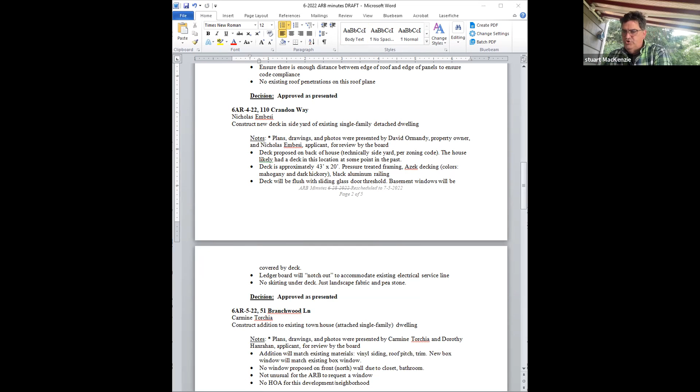First order of business is old business 6AR-6-21, 1835 Monroe Avenue. The Cabot Group modified approved facade improvements from 2021 to Brighton Commons. Is anyone from the Cabot Group here? Yes, Bruce Hunt is here.

Okay, thank you for adding me to the agenda. I would like to apologize for taking up your time at the last meeting. I did not have enough information, and that was obvious. So we went back to our architect, and I believe we resolved some of the issues you had with our plan to move to a metal ACM panel on the north elevation versus using the EIFS on the entire length of that section of building. There was a concern about how we're going to tie the panel into the EIFS, and I think we've come up with a good plan now.

On either end, we will have one section of the EIFS installed, and then there will be an ACM facade framed out to tie everything together. The ACM panel we chose is a larger panel that'll have the same sectional cuts as the EIFS does in the plaza, and it's of the same color as other ACM in the plaza, so I think it all wraps together really nice.

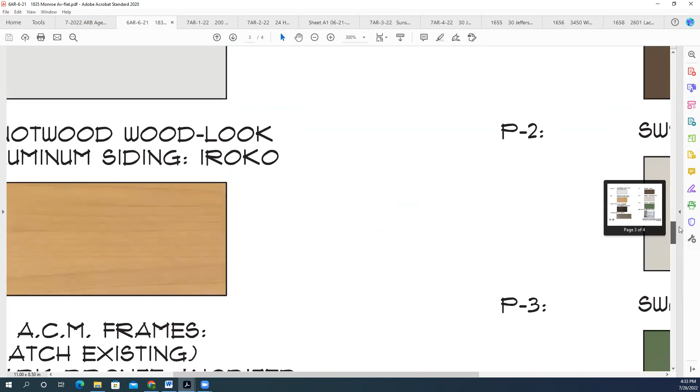Oh, I thought it was white. No, not white. You should have a sample there, I think, that was dropped off at the town. Yeah, the second page in the PDF did say bone white, but the drawings indicate, or at least the existing drawings did indicate aluminum. Okay, that's what threw me off. Clear aluminum, thanks. Yeah, so clear aluminum to match what was already submitted for the rest of the building, correct? Correct. Okay, thank you, so it should all match very well. You know, the last time we came here, we had a metal product that really wasn't adequate. We eventually agreed with that.

Anyone have any questions? Fran? Nope, I'm all good, Stuart. Thanks. Casey? No, I think I'm good. It's definitely an improvement and it ties it much better into the rest of the building, so thank you. Mary? Fine, thank you. Andrew? I'm good. Brian? Looks good, thank you.

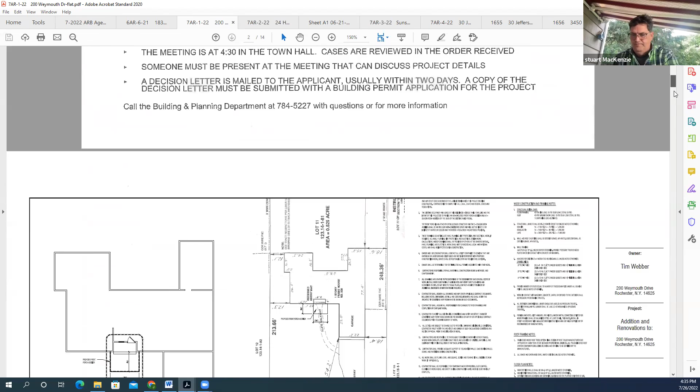Next on our agenda is new business. 7AR-1-22, 200 Weymouth Drive. Tim and Colleen Webber, construct a front porch on existing single-family home. Are the Webbers here? Tim is, yep, I'm here. Okay, why don't you go ahead?

So the front of our house is almost all garage, and I don't know if you have seen photos of that. There you go. What we're looking to do is give our front entrance some prominence. The door is kind of hidden, and when you come up to the door and open that storm door, you have to step backwards and you're right on the edge of that step. So we're looking to accomplish a couple things: make the front entrance have some prominence, have a porch there that pulls that step out away from the door to make it safer, make it look nice, and give us a place to sit down and be neighborly. Kind of boils down to that.

It would include the stone that you see in there. We cut back into the roof so that the stone sets back at that same wall face where that door is. And then it would go up into, I think you can kind of see it there on the right-hand side, lower right, that's what we're trying to do there. So we got to cut into the roof to make that happen, and then the stone would all match the stone that's on the garage.

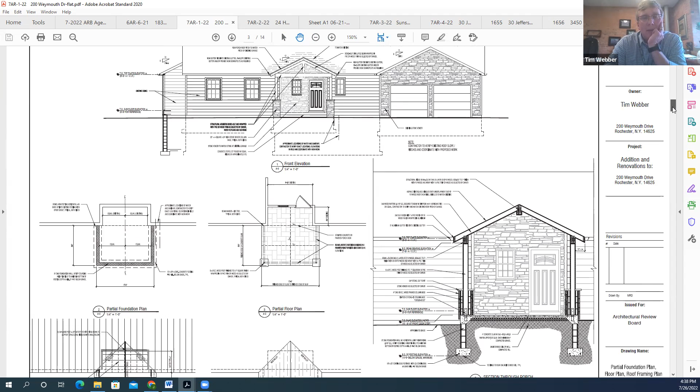The roof would match the roof that we have. It would all be trimmed out with, I think it's Azek PVC type material. And then I provided the catalog cuts for the stone as well, which is a cultured stone.

That's actually up against our house color there. Figured that was better than the catalog cut itself. I thought it represents the color better.

Okay Fran, do you have any questions? Yeah, what is the underside, the exposed ceiling beneath the overhang? It would be a beadboard, which I think in this millwork you might have an image of that as well. And what I'd want to do is a couple of recessed puck lights, and then have some options where we could do the recessed lighting or have a single light kind of hanging, and turn either one of those on. Okay, for whatever ambience we're looking for, right?

Right, no that's all I have. Thank you. Thank you. Casey? Fran asked my only question. It looks nice, thank you.

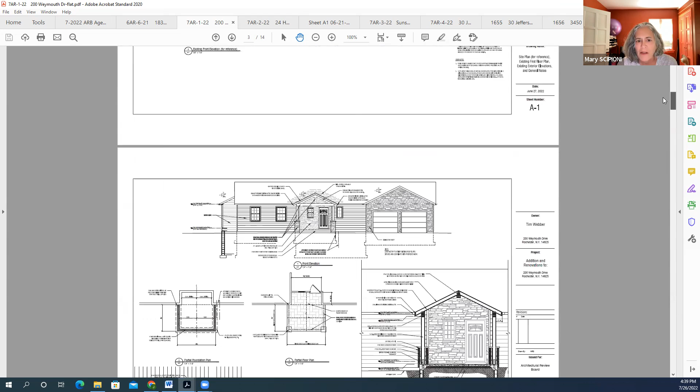Mary? I have a question about the piers with the veneer stone on them. Rather than sitting on the lower step, you have the veneer coming on the outside of the steps, and then it stops short, so you have this kind of exposed gap thing going on down there. I just wondered why that decision.

So it actually just ends, the veneer just ends short of the ground. So grade would come up to that, and I wouldn't want that to look like it's hanging in the air. Right, so I'm just wondering why you didn't just set them on the lower step and cut away the landing. I was just curious what drove that decision, because it looks like it's missing a base this way to me.

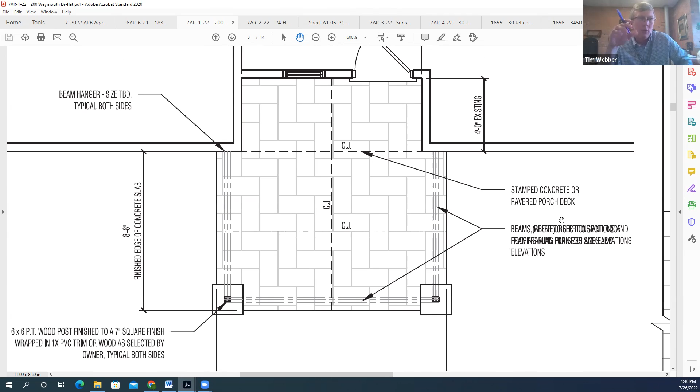I don't know if anybody else considers that an issue. Wishing I had my architect here with me. He specifically talked about that, and I'm trying to recall the language that he used. He wanted to make sure that those had some weight to it. And if you go to the plan, it sticks out from the step, I believe.

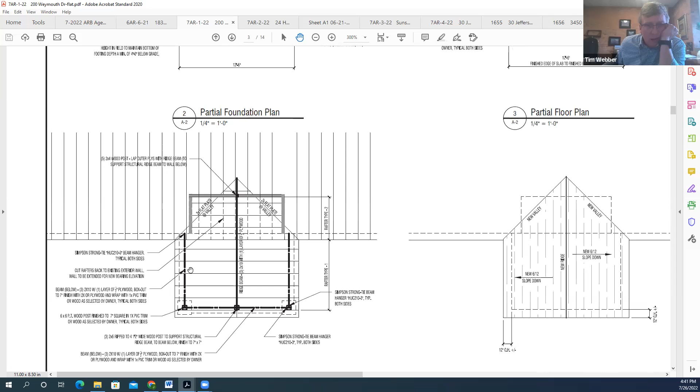Yeah, I see that it sticks out from the step. I mean, part of it might be if they did set it back so it sits flush with the concrete, then you would have the full height of the concrete exposed where there wasn't a step. So maybe they were just trying to conceal that. And I think it helps create some dimension there too, next to the step, by having it stick out a little bit from the step.

Which step are we talking about? It'd be the bottom step there. It just looks to me like they're missing a base, and there's always a concern with having the veneer running right into the ground, just ending in the ground. But it was just a question. That's all I had, Stuart.

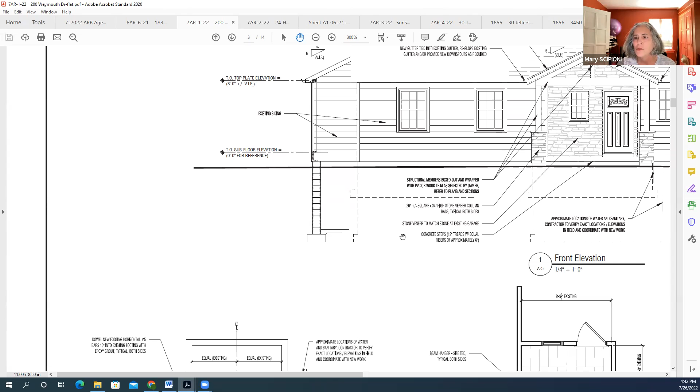Okay, Andrew? Well, on that note, I think one solution to that may be to actually put a natural stone as a base stone to your cultured stone. So your natural stone can touch the ground, so you don't have moisture contact with your stone veneer, and that could solve the issue and provide that base.

I agree, it cannot hang. It should not be hanging above the grade. And number two, you can't have soil contact with that stone veneer. Otherwise, you're going to have moisture wicking up into your stone veneer. So there's a couple different solutions, but I think that can be resolved.

My question about the gutters is there's a note that says you can reslope the gutter and or provide new downspouts as required. Jason, could you pull the existing photograph back up again, please?

So the downspout run for the front, you have, doesn't even appear, it's not on the corner. How about the inside corner of the garage and house? There's one at both ends of that front face. There is? Okay, yeah, it's hard to see because we painted it the same color as the house.

Okay, excellent. And that was exactly going to be my comment, that if you do have to put gutters onto this new addition, they should not be readily visible if possible. Oh believe me, my wife will be all over that. Okay, excellent, well that's excellent.

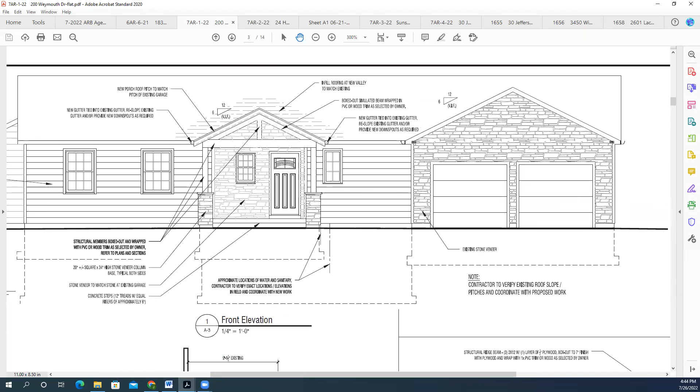And I guess my last question is, the stone veneer that you have selected, that matches your existing stone veneer on the garage? Correct. Or is it the same material? Yep. Okay, yeah, otherwise I think this looks pretty good.

And I appreciate the comment on that base, a natural stone there. By all means, I am happy to add that, it just needs a little punctuation. Yeah, understood, makes sense. Brian, any questions?

I just had one on the section view. We were just talking about the stone veneer going down. In the section view, it looks like the stone veneer covers the slab on the sides. Is that what I'm looking at? You guys see that? Yeah.

Does it do it on just the sides and not the front, or on the front as well? It would do it on the front as well. You're talking about the stone veneer, where it drops down below the slab right there. It would maintain that same elevation around, with exception to where you've got a walking surface. I would want that same elevation coming around the front side as well, but it comes off that front step to add some dimension there.

So Mary, your question was it doesn't look like it's got a base there, like there's no separation. Well, also because of the wicking that Andrew mentioned, it just needs that. It looks unfinished. We can certainly add that there. That's no problem. All right, I'm all set. Thank you.

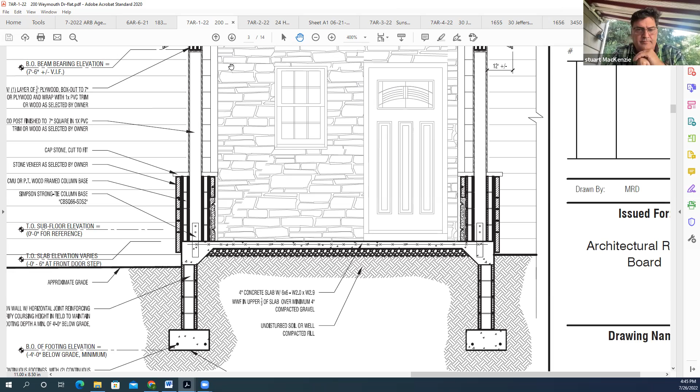All right, I just got two points or two questions for you. You can always carry your bottom step across the front of that pier as well, instead of that. Yeah, that may work as a base, but you may also get some wicking.

The only thing I catch on the existing house is you've got a vent stack to the right of your proposed gable. Just want to make sure your draft isn't changing, that it's still a positive draft on that. Correct, we'll be able to avoid that. Yeah, so just make sure your architect checks that, otherwise your first floor bathroom won't smell very good on certain days. So that's all I have.

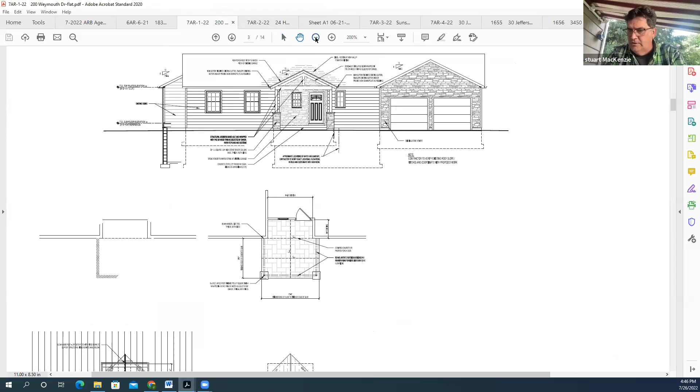Next on our agenda is 7AR-2-22, 24 Hemingway Drive, Randall Peacock. Construct addition to an existing attached garage on a single family dwelling. Is Randall here? I am here. Hi, welcome. Hey, good evening, Stuart, and the rest of the board members.

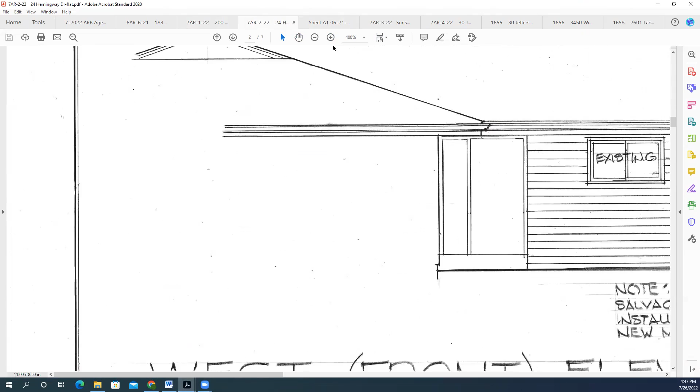This is a fascinating project they have before you. We had a zoning board of appeals meeting recently, and they granted a variance to meet the setbacks that we're doing here. These are these lovely houses on Hemingway that have no basements, they're all slab on grade. And my client would like to enlarge her garage.

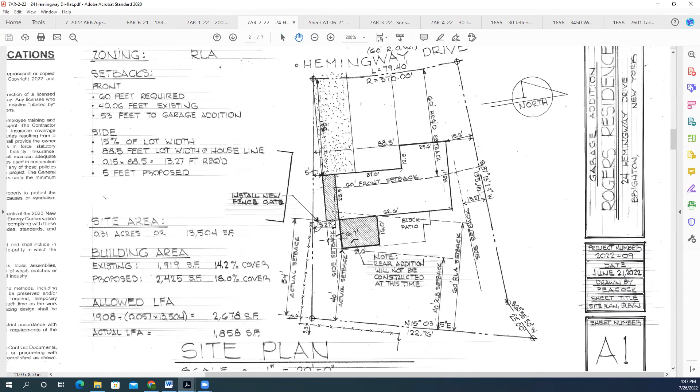We're extending it over, I think it's 6 feet or something like that, 6.7 feet, 6'8", 6.6 feet. I'm just going to extrude the existing house, same roof detail as what's on there now. I noticed, Jason, you have the older drawing there. Did you have the new ones I sent to you?

That would be better. As of late last week, my client asked me to go to a 14-foot overhead door, and the overhead door that I had on the initial application ended up being a $19,000 overhead door, which is something I'm really good at, picking the most expensive thing out there. This is more like a $2,700 overhead door, which works a little better in the budget for the project. This one's a CHI model 2250 in an almond, desert tan color, which matches the trim on the house.

We are going to take the siding off of the side of the house and reuse that on the front, so the front siding will match. We'll match it with a similar 5-inch exposure, same color vinyl down the side and the back. The roofing will be matched in there. They'll end up taking that roof off all the way back to the left side of the garage door you see in that elevation on the front of you right now.

Those roofs on those houses are way scary underframed. They're 2x6 rafters, and that little hip and the little gable poking up there. I look at it and I go, man, I just can't believe this stuff stands there. There's one 2x6 rafter with a couple of 2x6 horizontals that pick up the hip rafters and then pick up those rafters that run down the side. So we're changing that structure a little bit in the process of doing this.

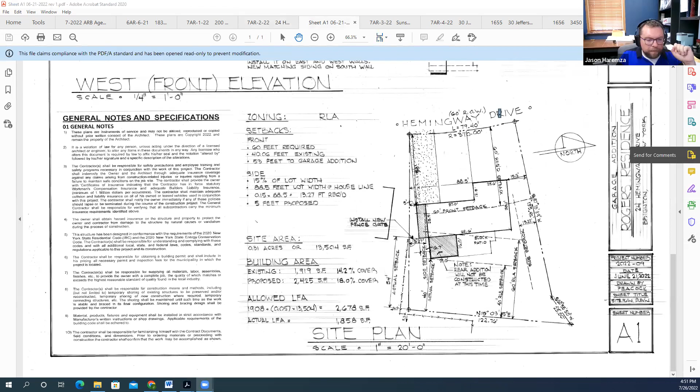Thank you, Casey? Jason, can you go to the new drawings and go to the south side elevation, just so we can see if anything changed on that sheet? Give me a moment, I've got to pull that up—that one stays the same. Okay, so it still has the one window and the end of the roof detail. I didn't give them an update on that sheet because it didn't change.

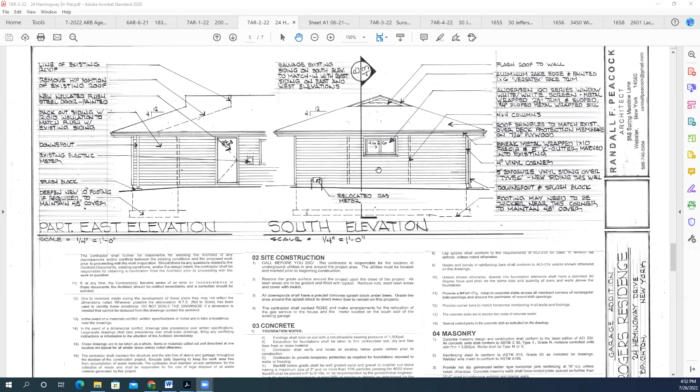I had a long discussion with my client about the window. She didn't want a window there, and I said, I know the Brighton Architectural Review Board, they're going to want a window there. So thank you for bringing that up and reinforcing the advice. I can only give advice, I can't make people take it.

Yeah, no, it looks good, so thank you, no questions. Thank you, Casey. Mary? Could we look at the photo a second, Jason, please?

I just wanted to ask Randy, is the corner of the garage at the edge of the driveway there? Yes, it'll be right about the edge of the driveway. And then is the property line at the bottom of the slope? Yes, you can see where that fence kind of bottoms out in the back—that's where the property line is. We still have, I think, 5 feet to the property line. Okay, that's all I wanted to know out of curiosity. Thank you.

Andrew? No, I don't have any questions. Okay, Brian? Looks good, I'm all set. And I don't have any questions either.

So Randy, you can call Jason's office in the morning to get our answer. I'd be happy to. Appreciate your presentation. You're welcome, take care, thank you.

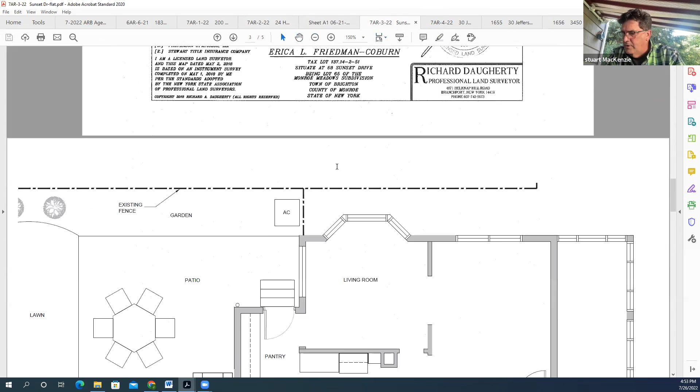Next on our agenda is 7AR-3-22, 58 Sunset Drive, James Coburn—rebuild front stoop on existing family dwelling.

Yes, hi, good afternoon, thank you for taking a look at this. The existing condition is that photo on the bottom right. We bought the house as a flip 4 years ago, and I think the previous owner put a couple of little steps at that front door—they're just hard to maneuver going into that porch, and that's the door we use every day. So my goal is to get a landing at that stair and then have a set of stairs going to the front and a set of stairs going to the back.

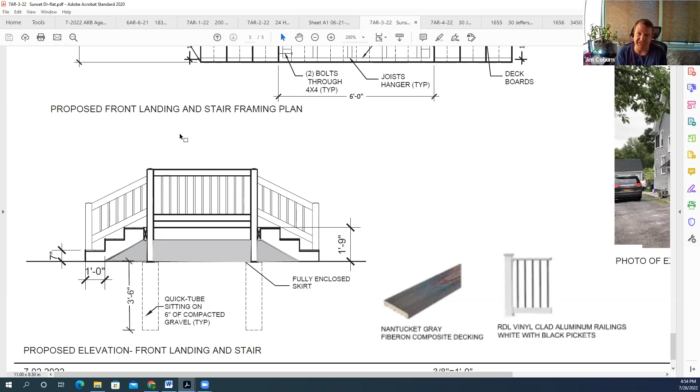All the finishes would be Fiberon, as I have on that drawing. It's all composite material and vinyl railings in gray and white, and the pickets would be black to match the existing siding on the house in gray. So no changes to the roof line—it's really just a landing and a set of stairs to the front and a set of stairs to the back.

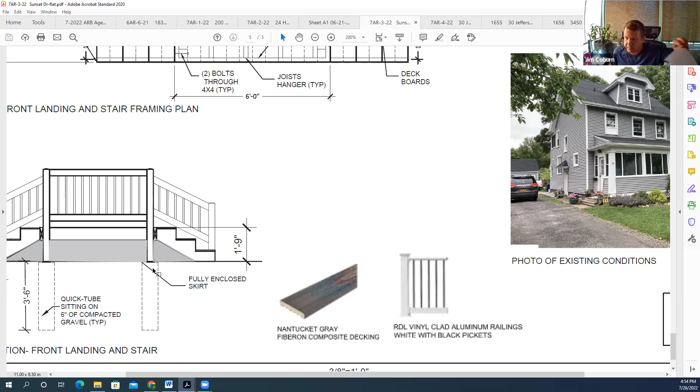Sorry about that, thank you. Fran, any questions? Yeah, I have a couple. So the fully enclosed skirt—what is the material for that skirt? It's the same manufacturer as that Fiberon composite decking, and it will be ribbed.

If I can, let me see if I have something better from the builder's description. He calls it a full composite skirt with hidden fasteners. So if I understand it correctly, it's going to be vertically ribbed, but not as wide as the deck board—probably like a 4-inch ribbed skirt system. Okay.

And in the photo of the actual product, the RDL vinyl clad railing has a very small profile top picket and top rail. And I know in the elevation that's drawn, it's pretty beefy—so what is the intent? The image is more accurate. I drew this long before the builder arrived and said, hey, why don't we use an RDL vinyl clad. Okay.

Okay, that's those are the only questions I have. Thank you. Okay, Casey?

Starting with the plan view, I know in the photo it looks like the enclosed porch has maybe a foot or two of a recess between it and the adjacent house, but the plan shows it flush. So how are you dealing with that in reality?

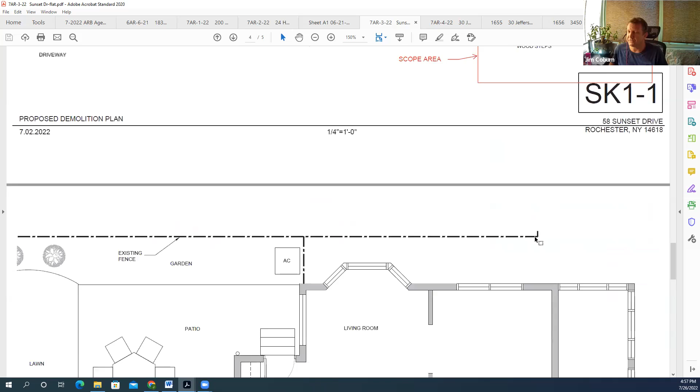The 5 foot mark, wherever that ends up being measured from, where does that actually land you in comparison with the driveway? It's almost, go back to that photo. It's almost exactly where there's a concrete pad that stops right there. Yep, there's blacktop to concrete. That's the 5 foot mark.

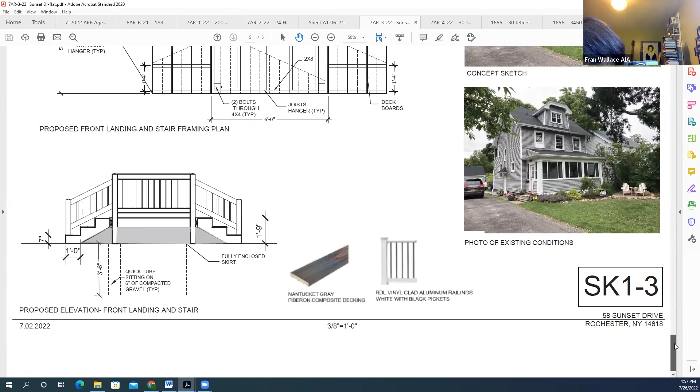Okay, so you've lived in this house for a few years, it sounds like, right? 4 years, yes. Okay, so how do you do your plowing? I guess that's a huge concern right here. Whether it's you plowing or someone professionally, you're right on top of your driveway.

Yeah, I snow blow. I kind of split it in half. I send some to the side carefully by the house in this image to the left, and the rest goes back to the right behind the house. And then from this new porch forward, of course, I can shoot it into the front yard.

Okay. But do you have any concerns with actually hitting it, swiping it? I guess I just don't want you getting so close to your driveway. Yeah, no, I understand. I thought about that too, and I've paid attention.

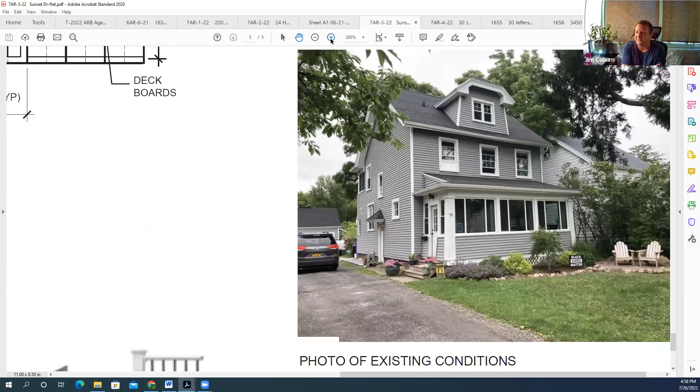I drew this quite a while ago, and I've paid attention to how often we come close to that. You'll see a planter in that existing photo that has been there for 4 years, and we've never hit it. It stays there all winter too. So I feel pretty comfortable that we wouldn't be banging into it.

I don't know, when the kids start driving in 8 years, maybe it'll have to be a lesson to watch out for our porch, but there you go. Erica and I have been fine so far.

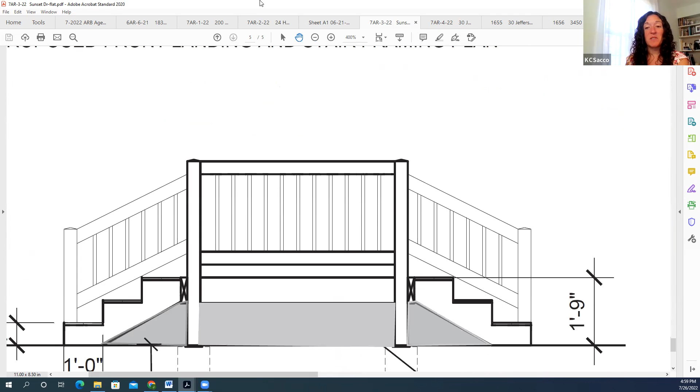Okay, and then it sounds like that side view, everything will be fully enclosed with that vertical panel you were talking about. Yes. And I agree with Fran, I like the image that you included more than what you've drawn with the thinner top rail.

So yeah, I think maybe just make sure you double check those dimensions, the recess versus the main house, and get that squared away so the landing comes inward and your front stairs get a little narrower to accommodate the recess. But I don't have any other questions. Thank you, Casey.

Mary? Yeah, navigating that bump out was my major concern. I also wanted to ask if you plan on having a landing on the forward steps, at the bottom of the forward steps.

Yes, it's also in our plan to redo the driveway, a full tear out once this is done. I'm not widening the driveway, but I might try to just have it swoop over so the blacktop goes right to the bottom step, or we'll put in pavers or some kind of a small landing at the bottom of those steps.

Okay, thank you. I'm all set. Andrew? Yeah, I think a lot of the questions that I had have already been asked.

Just a point of treatment underneath this addition, are you planning on putting a solid surface underneath that? Are you keeping the concrete landing there? It's a small space. I don't know what's underneath the covered porch area, but I—you do.

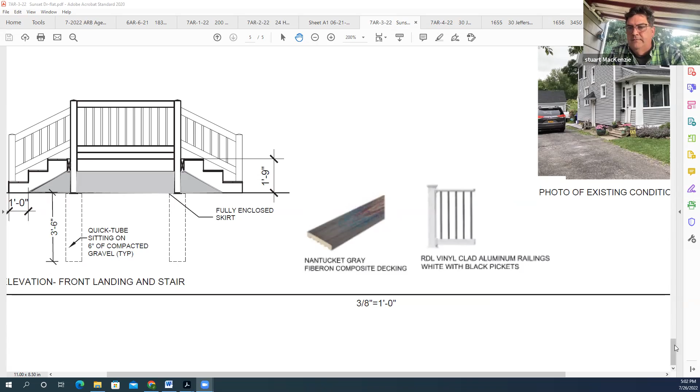Your 5-foot dimension is called out in two different parts. One, you have it off the threshold out, and the other you have it off the side of the house, so just verify your dimensions. Look at your two different drawings, here you've got it 5 feet on your survey, and then on your other drawing you have it from the side of the house. When I fix the drawing to get that porch setback, I'll update the dimensions.

So your stairs are actually going to be smaller than you proposed. The other thing is just make sure your front yard setback is respected, that there's no variance if you're exceeding the front of the house there. Okay, I can double check it. I think otherwise we're in good shape, but maybe another committee member should check that. Is he good on that? He's good on that, yeah.

Stoops are allowed to encroach into the front yard setback. Okay, that's all I have. Good luck, and you can call Jason's office in the morning to get our answer. Okay, I appreciate your time. Thanks, everybody.

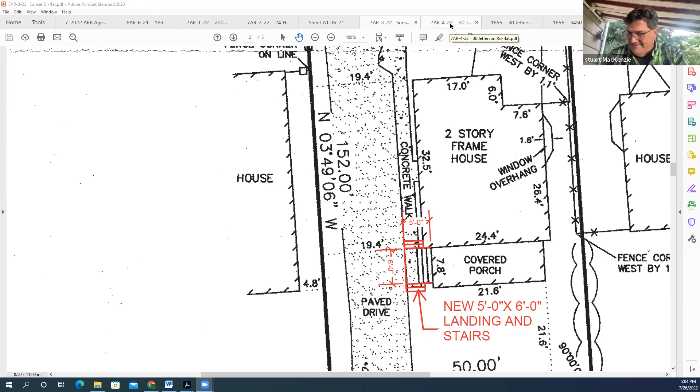Next on our agenda is 7AR-4-22, 30 Jefferson Road, Superstruct Architecture PC, facade renovations to an existing retail structure. I'm here representing the owners. My name is Stuart MacKenzie, architect working with the owners. We previously submitted for a use variance on this site and planning board application. I prepared the architectural review board documents and worked with a local vendor for the signage application as well.

This is an existing building, it's been vacant for quite some time, it used to be a repair garage. The current owners are looking to put a mercantile occupancy liquor store in this location. As you can see, the building's pretty dilapidated. The architectural scope for improvement would be to pull down all the existing board-ups, replace the roof, take the chimney off the roof since it's no longer necessary, tuck point the existing brick, provide architectural metal panel infill of some of the openings, and provide aluminum storefront in the window and door openings to remain.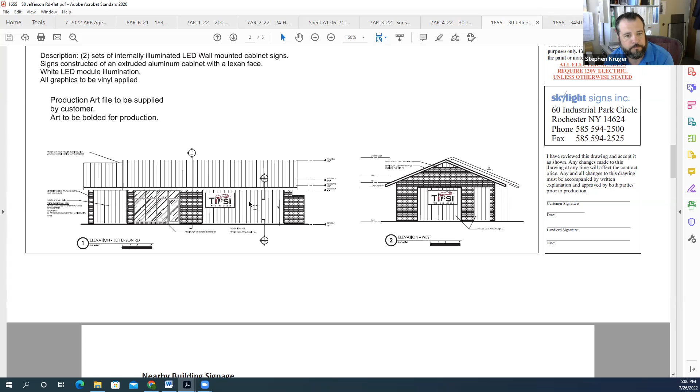Okay, all set? Fran, any questions on both the sign and the building? So the sign, you said you haven't received the variance yet, or it's submitted at the same time? Submitted at the same time. Okay, so we still go ahead and review it, Stuart? The signs too?

Stuart? Stuart, you're mute. Fran, I was talking to you, Fran.

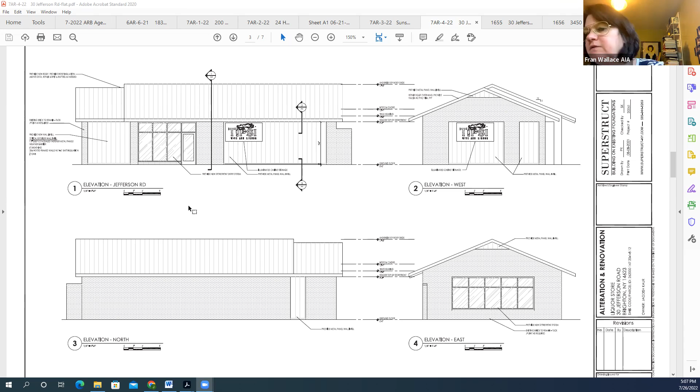So we're reviewing the sign. I believe it's the one that doesn't have the variance, so that's the one on the front, the west facade. We're calling the primary elevation the Jefferson Road elevation. And if you have any questions on the building as well, the precedent photos were helpful, but could you just go over the colors quickly?

If you go to the last page of the architectural package, we provided some precedent examples of what we were looking to do with an existing red brick color, a dark vertical ribbed metal panel, just to provide some contrast. And then the aluminum storefront would also be a dark metal to provide that contrast to the existing brick.

So the panel would be a dark brown or dark gray, or the red? Dark brownish gray. We're thinking it'll be more in a 12-inch width with either a half-inch reveal or no reveal at all for a vertical.

Okay, those are all my questions. Casey? I think I'd want more specific information on what the vertical panel really is - the exact color and profile. It seemed a little, it's gray, it's brown, it's red, it might be big, it might be small. Not quite enough for me to really visualize what you're proposing.

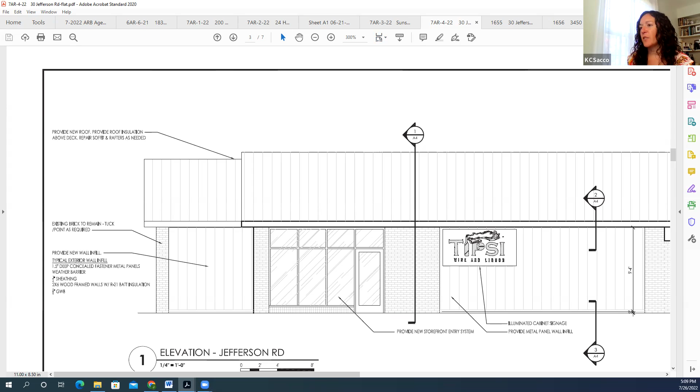If we go back to the elevations, the new storefront systems all have a hatch on them. Is that going to be clear glass, or are you suggesting it might be a spandrel system? It would be clear glass. So the whole thing, top to bottom, door and transom? Yep. And both sides, including the east elevation? Correct. Okay, that's nice.

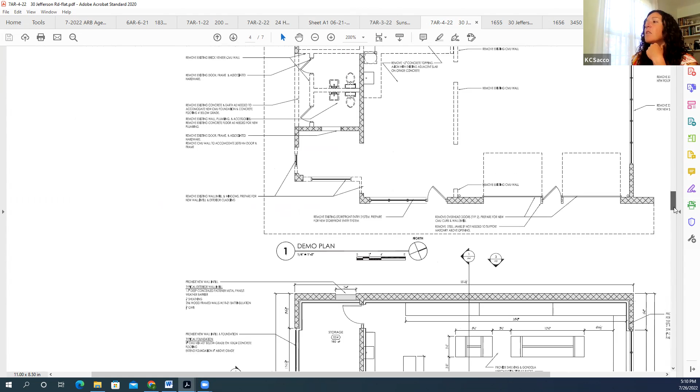Let's see, hold on one sec, if I'm gonna go to A4 on my computer. Just wanted to look at the base. So if we go to section 3 on A4, at the bottom of the panel system right now it's showing exposed CMU. What is your plan there for the base of this building where we have the metal panel? For the infill piece, it would just be an aluminum trim panel to match the metal panel to engage with the ground. How would it fasten to that CMU?

It'd come up behind that metal panel, attach either to the sill plate or directly, we could put furring strips on. I guess we haven't detailed it yet, but it would be like a trim flashing, a base flashing that would engage with the ground. So it'll either be on furring strips - we're doing concealed fasteners on the metal panel. We would either clip that to the base and the sill, so you wouldn't see the fasteners, essentially.

I'm just worried about durability and making sure it's proper construction. And then what would this be up against - is it a sidewalk adjacent to wherever you have the panel, or is it a mix of sidewalk and grade? So the infills would be sidewalk. Alrighty, I believe that was all I had for questions, so thank you.

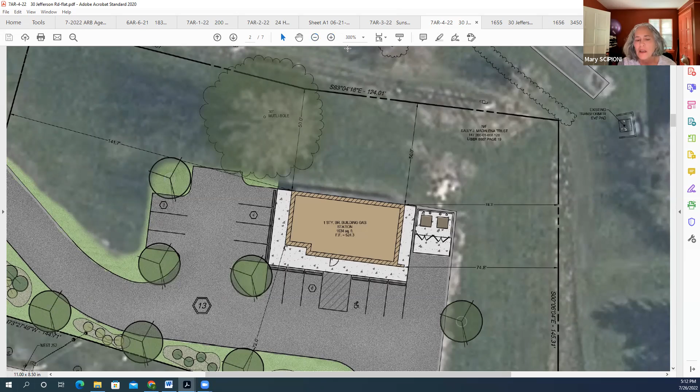Anyway, to Casey's point about the materials, I think saying that these are the sort of things we want to use is not enough information for us, given that this is a simple box. The materials and the detailing, where one material meets another material, is pretty important. So that's all I'll say about that.

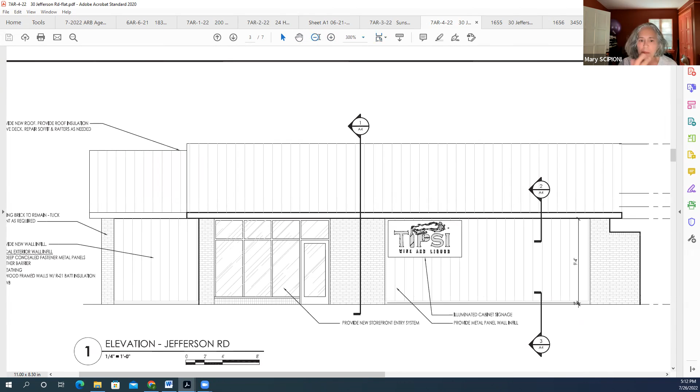And the other thing is the sign. It's cute, but I find that gimmicky signs sacrifice legibility, and the speeds on Jefferson Road are such that I think you shoot yourself in the foot a little bit. It says wine and liquor - I guess that's what people need to know, and people that go there regularly will know what it is. It's just not a highly legible sign. That's all, just a comment. Thank you, Stuart. Andrew?

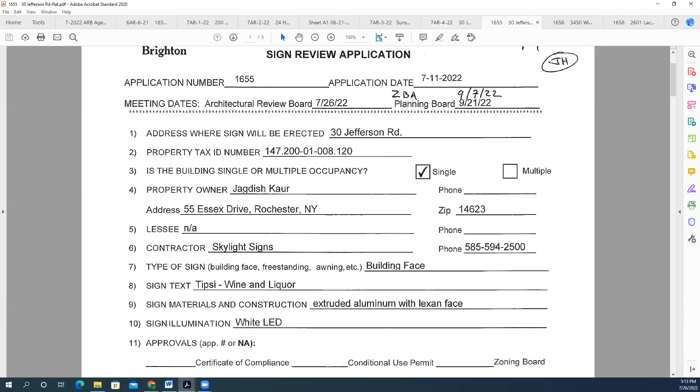I'd reiterate about the materials - I'd like to see the specifications on those and exact colors. I agree that we need to see a little bit more detail. Overall, concept wise, I'm fine with the concept, but we need to see more to make a final decision. I also agree with Mary's commentary that there's an awful lot going on in this sign that makes it difficult to read. When I first saw the sign, I thought it was a vape shop, quite honestly, because it kind of looks like smoke coming off the top where it says Tipsi. There's a lot going on in that sign that's not going to be legible from Jefferson Road. I agree with that point.

Is this being used as part of the company's name? Is this an image that is synonymous with Tipsi?

Well, I think in all likelihood it would try to be that. This is not a franchise place, so this is a one-off, the first of its kind for these owners. So I think they would be okay with some constructive criticism of the sign. This was originally designed as a channel letter sign, and it was way more sophisticated. Obviously with sophistication come costs, so they went to an acrylic box sign backlit. I think it lost some of its grandeur in doing so.

I do think your comments regarding the distance and speed of traffic on Jefferson could go back, and maybe provide some reiteration of this to make it less complicated. They could still use it as a branding technique, but maybe simplify the actual building sign. That would be the comments I'd take back to them.

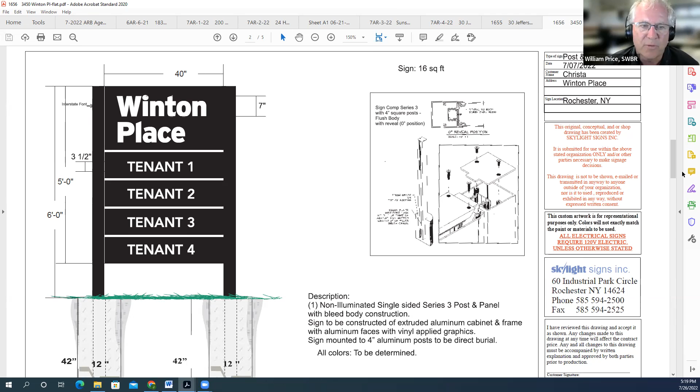And one part of this is to add this sign.

This is where we would propose to put the sign. That particular island is going to get a little bit of a geometric change. In the drawing in front of you, we're going to extend that so we don't have a drive lane from the parking lot coming out toward that intersection.

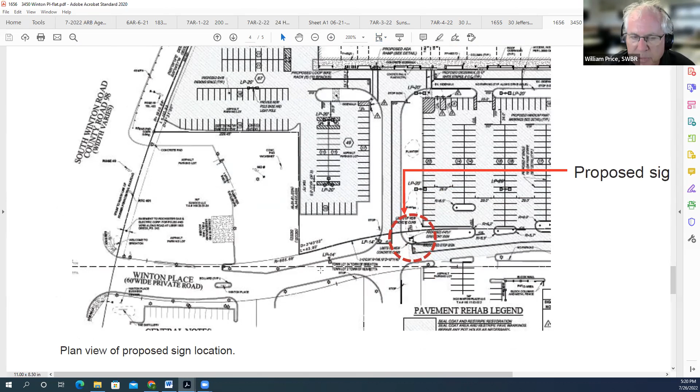We're going to block that off and have a little deeper queuing at that internal intersection. In addition, we'd like to put this sign black with white lettering, and to keep within code, we'll only have room for 4 tenant signs. There's potentially a range of tenants in this building.

There's currently more than 4 tenants, but the 4 largest would get a sign. Some are in construction, some new applications are coming on, and new tenants are being considered. I can't tell you exactly who, but Dal-Tile has a big footprint, so does ProSource, so does Ace Swim and Leisure, and so does Sequels, a furniture store that's in there.

The rest of the plaza is going to be power washed, painted, and none of the signage on the building is going to change. Everything that's currently there will remain the same. It's just this sign we're asking for as part of the overall site improvements.

Any questions or comments? Fran: you mentioned this would be black, but the drawing says all colors are to be determined. Just want to verify it's black with white lettering. Yes.

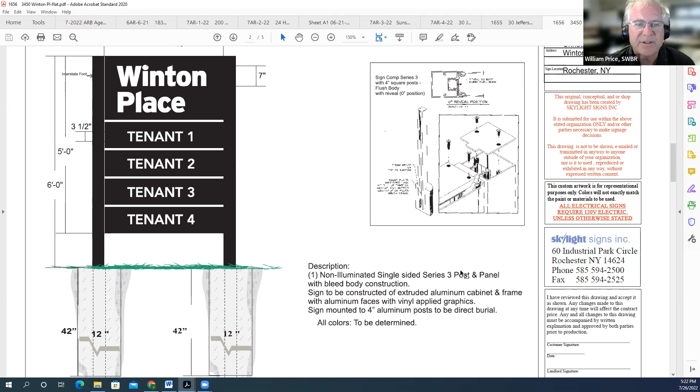There's a chance we are looking at a color for the back of the building that is a dark charcoal gray. If they like that color, they may go with a dark charcoal gray, but it would be just a little bit lighter than this color. It would not be anything lighter than charcoal gray, with white lettering.

Okay, thank you. Thank you. Casey?

Is this just going to be one-sided? Yes, one-sided. If I can finagle it, I'd like to put the stop sign on the back so we don't have two signs in the same location, to reduce clutter. So far nobody's said I can't, but I'm being cautious about that.

Just one-sided though. The answer is it's one-sided. All right, sounds good.

I was going to ask, since it's non-illuminated, will you have any kind of uplights pointing at it? At this point, no. We'll be bringing electric out here, running conduit between the islands along the access drive that don't exist today, in case we end up putting lighting out there someday. We'll start with lighting where it's currently located, but new light poles and fixtures will be on the existing pole bases.

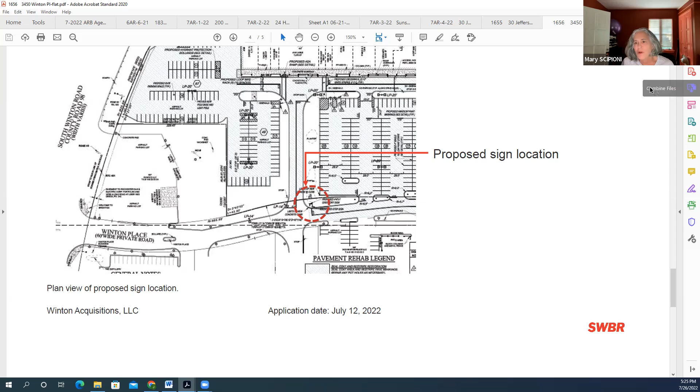No, we'll have consistent lettering. We've picked the lettering style. The size will vary though, Mary, because we'll try our best to keep a consistent letter height, but if they try to put Ace, Swim, and Leisure on there, that's going to make the font smaller. The font will stay the same. If we can get them to reduce it, we can get more consistent heights of the lettering. That's the part that would vary, not the font. So the font and color will be the same for all 4 tenants.

Yes, correct. On this sign, it won't change. Of course. Yes, thank you.

Andrew? Yeah, all my questions have kind of been answered here. I am in favor of that, the dark gray over the black. Yeah, and all the other questions have been asked and answered. So thank you very much.

Great. Brian? Just other than that, pretty much everything's been answered. The only thing I was going to say is if you go in and start figuring out text height and all that, start with your worst case scenario first and then work backwards.

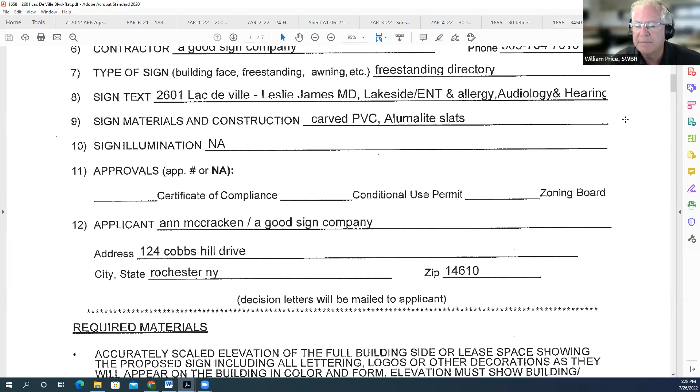Bye, bye-bye. Next is 1658, 2601 Lac De Ville Boulevard, a good sign company, directory sign, 5 tenant spaces.

Fran, any comments? Just the spacing between the number and the Lac De Ville title, it's a little crowded there. I don't know if that's a mistake or not. And then I just want some more detail on the slat vinyl lettering. Is the slat removable? Is it just adhered?

Is there someone here to represent the sign? Or are we just commenting now? No, we were lucky, signs are not typically represented by applicants, so. Okay, yeah, those are my comments.

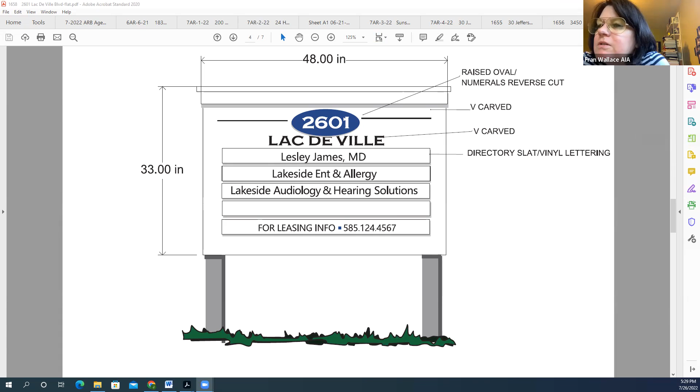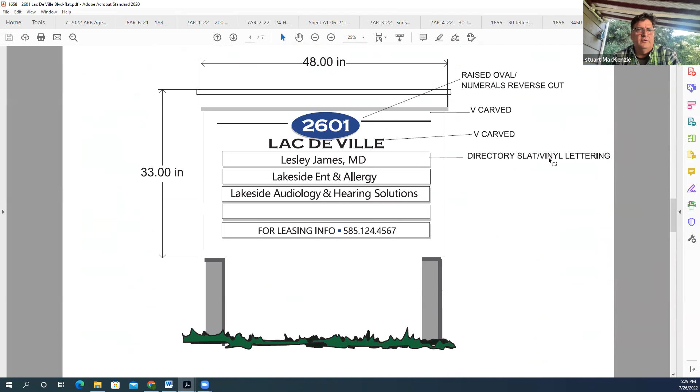It's a little, is there another sheet for this one? No, it's just there, like, how is it? And I'd like to see a section of what this really is. It was hard to understand what's happening. And do they have more than one? I saw that site plan, looked like there was more than one sign location.

No, the site plan is a bit more complex than it needs to be. She's indicating where these various views are taken from. Okay, the actual sign is letter E. All right, okay.

Fran, you all set? Yes. Casey? Yeah, I agree with everything that Fran said. We definitely need more information. What is the height off the ground? What is the box itself? What is the depth of it?

It just says, well, I don't know what the actual, it's just a PVC box, but I'd want to know what the depth is, how high it is. What is this cap kind of structure going around the top of it? What are the posts, size, and what is the material color?

And then also, yeah, that oval, it's not centered on the V carved line, and it does overlap with the DE, which is not ideal, obviously. So those were my comments looking at it.

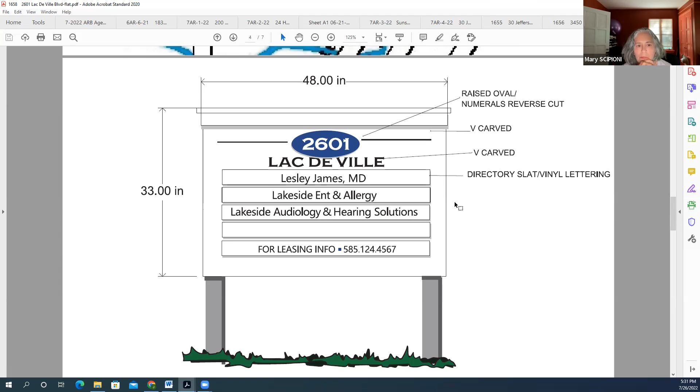Thanks, Casey. Mary? I thought I just saw this sign today and it was already there. I agree with what has been said. I don't get what these, obviously there's a shadow line above the blue medallion, but then there's a rectangle, which I guess could be shielding a lighting fixture or something, or I don't know. And then there's another rectangle which goes outside of the dimension lines, which I'm not sure what that is. So I guess we do need a profile or some explanation of how they're rigging this thing up. So yeah, agreed with all. Needs more info.

Okay, thanks Mary. Andrew? Yeah, I agree with all of those comments. Then the only other thing is whether or not this will be lit or not lit, internally lit, what their intent is with that as well.

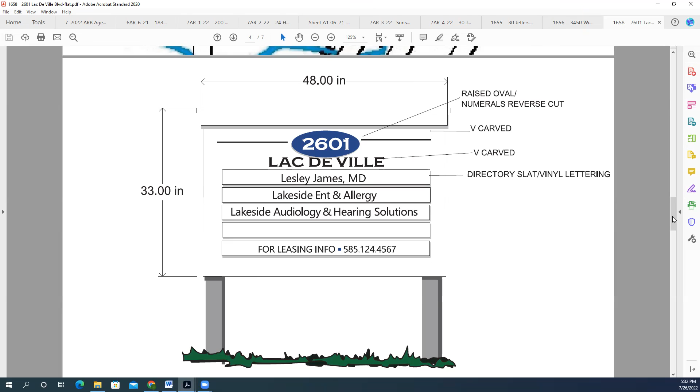Brian? All of the above, and I was going to say in the image above this that they show, kind of to the left, that little teeny image there in E, it looks like that sign is 16 feet tall. So that's not really a good representation. So we need to know a little bit more about the depth of it. It could be 20 feet deep, we don't know, we have no idea. So I think we need more detail.

I think if you go to the last page in the packet, you'll see what the intention is on that island. There we go. In general, the graphics are lacking, and I don't know if it's just how it got emailed, but, oh, that's the existing one? No, no, that's proposed. Well, because it doesn't have the line through it, through the medallion.

So it's not even legible, really. No. Yeah, needs more info. Submit legible drawings.

And don't perch the boulders, dig them in. What's this, the note on the last page that says 2 additional slats? Does that mean they didn't draw it large enough? What does that mean, 2 additional slats? And it says 4 feet by 2 feet 10 inches. That can't be right. That's what I don't get. Doesn't make any sense.

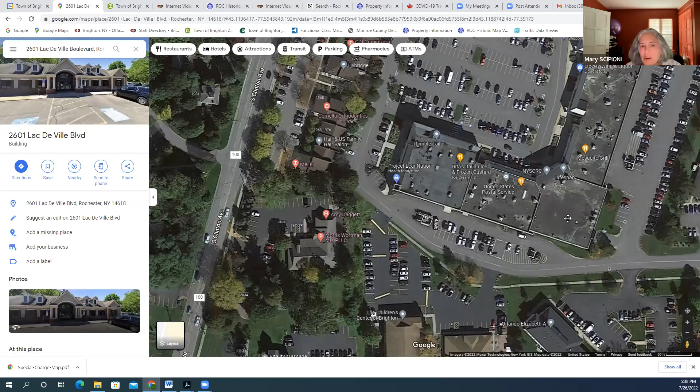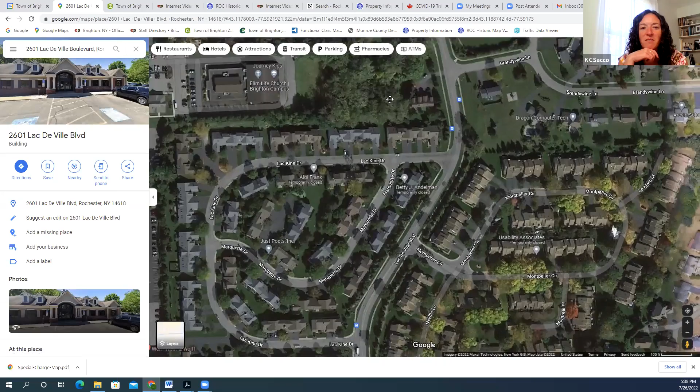Yeah, I think we just table it. It's on the side road, not there. What side road? If you go down Lac De Ville Boulevard and pass that, down south. Okay, so is it... no, I can't see, you're going too fast here. I'm trying to look for the medical buildings, they might be further down. No, you're in the townhouses right now. So go north, no, those are the townhouses. Where does it say? What's the name of your doctor? Is it Roy Kim? Oh no, here it is, Roy Kim, that's one building and the other one is across the road. So it's that road that tees with Lac De Ville Boulevard. I think that's where the signs are.

Flom Eye Institute... I'm not seeing any. So let's move on to old business. They're there, but I just don't know the exact location. I don't remember.

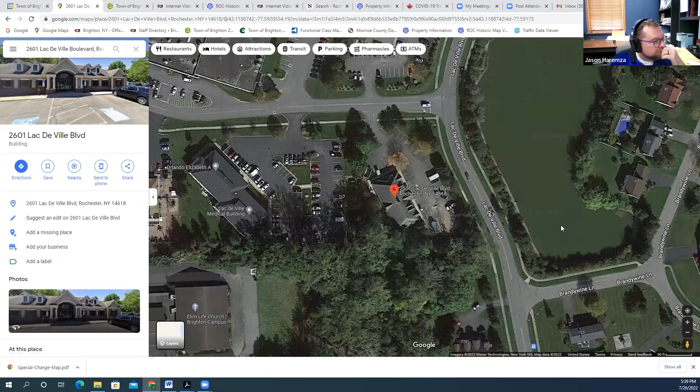So real quick, while we're on the subject of review - Fran, how about Bill Price's presentation? I approve. Casey? I approve. Do we want a recommendation on color? Yeah, I think charcoal gray was what was mentioned. Mary? Yes, approve. Andrew? Yeah, I would approve it with the charcoal gray, and make sure the text is all the same - that's one thing that would change with applicants coming in.

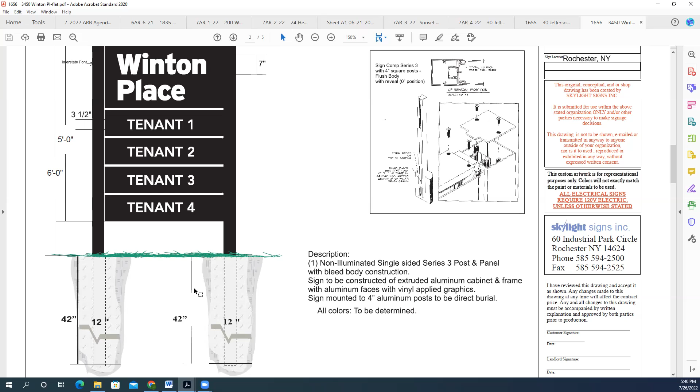We need to blanket all text for all the tenant signs to match. Stuart? I forgot to mention, is it intentional that Winton Place is not centered horizontally? I don't know, maybe that gets centered. It might be better if it's centered, but maybe they want it to the left so they can have more room for the tenant names, flagged left. Possibly, yeah, I don't know.

Brian? Approved. I also call out the frost line at 42 inches on this one. Look at that, two in one day. I think 42 is the new dimension.

Okay, how about Tipsy - sorry, just quick on this. Was the charcoal gray and the text a recommendation or a condition? Charcoal gray, I think, is a condition. I think the text should be a condition too, because that's what was presented, that all the tenant text was to match. The font, you mean, Andrew?

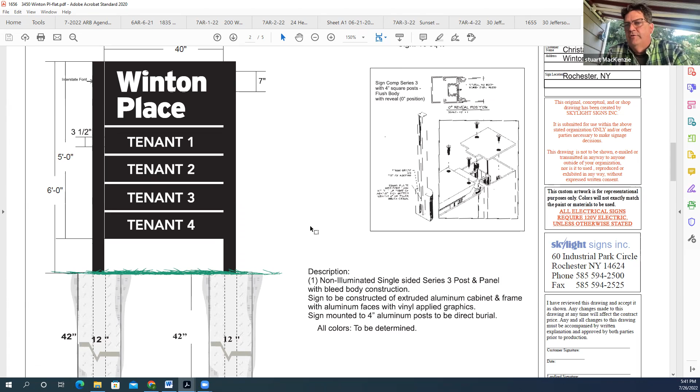And then recommendation, Mary - you want to center Winton Place? It's a question, I should have asked him, I just noticed it now. It's not centered and I don't know the reason. We can recommend that they center it, doesn't mean they have to. Okay, that's a good solution. Thank you.

Okay, so 1655, Tipsy - was that actually a formal presentation or just a quick review? For the sign, on everything? On everything, to me it was a quick, informal review. There wasn't enough presented. The sign is a different situation, but for the building itself, we're just writing recommendations - not tabling it, not denying it, not approving it. I think we all need more information on the material.

So then how do you want to do it? That's got to be a table, because you can't just leave it in limbo - it's got to be one of those three. I thought he just wanted an informal concept review. We've had concept reviews where we don't table it, we're just giving them input. Are you talking about the sign or the building? Both. What's it say on the application? We can't do that because they submitted an application, so the code says you've got 62 days to act on this, and after that it's a default approval, I think. So, tabled as presented.

Can we just do one at a time here - do the sign, then do the building? Yep, that would be easier, there's too much back and forth, I can't keep it straight. Yeah, I would prefer that too.

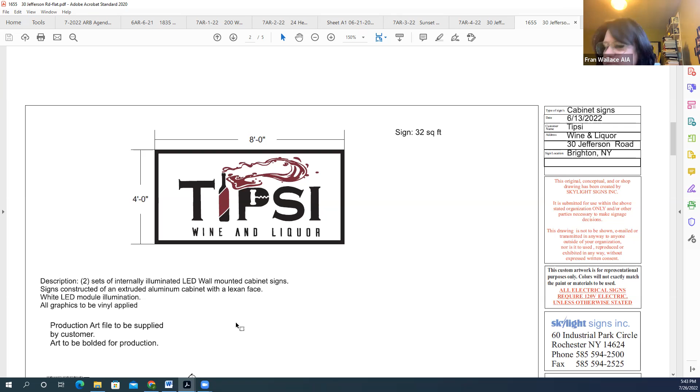Fran? Go ahead for the sign. Yeah, I really don't have an issue with the sign. I hear everyone, it's got a lot going on, but I don't have a problem with it, so I'm going to say approve. You're approving the sign? Yes.

Casey? I would be voting for tabling, just because it's very difficult to read - the lettering is okay, but the added graphics make it difficult. My recommendation would be to remove or revise some of the added graphics, like the plume and the spilling wine, because it's taking away and making it very difficult to read. Mary? Yes, simplify - possibly remove the plume, possibly shorten the bottle, and then Bob's your uncle.

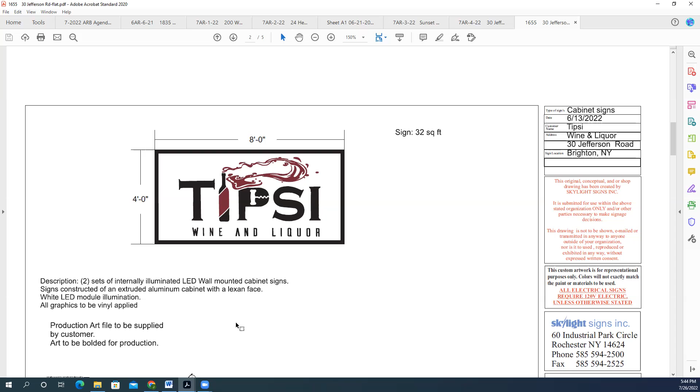Andy? Yeah, I would table this for the same reasons, to simplify the sign for easier readability. Brian? Same, legibility - wine and liquor should be bigger. True, good point. Actually, you don't need Tipsi there at all, just put wine and liquor. Exactly, I think we have a few of those around town where it just says wine and liquor. So I am in agreement - let's table it for all the aforementioned critique.

All right, so on to 6AR-6-21. So, Fran? I approve. Casey? I am good with approving. Mary? No wait, sorry - I would do approved with conditions, because I'd want to clarify the material color, since they had conflicting information.

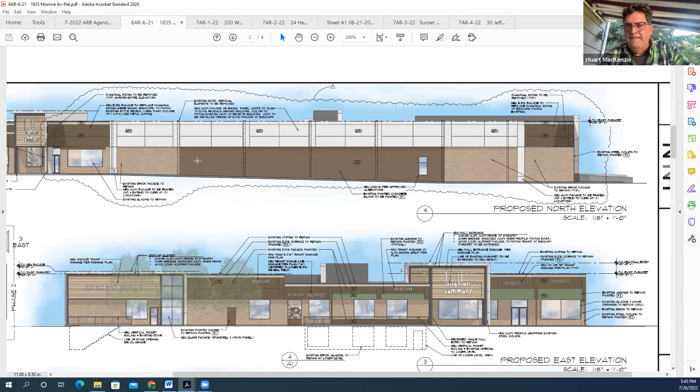Okay. Mary, I would agree with that. So approved. And are you saying, Casey, because you want the town to have a record of the material selection?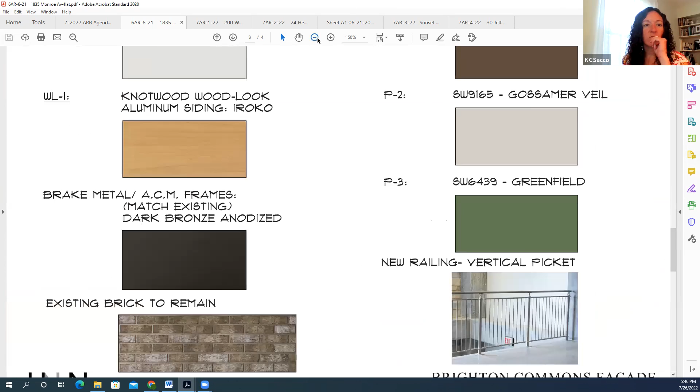Right, yeah, and to make sure it's done correctly, because on the second page it says bone white, but we actually want it to be the clear aluminum. If you zoom into one of the existing elevations, you go back - that says bone white, which is incorrect. If you zoom into one of the existing elevations, it has the ACM-1 and it calls it out. There you go, clear aluminum ACM frame.

So I'm assuming it's like just a clear anodized gray. So for color, we'd want it to be clear aluminum ACM, not bone white.

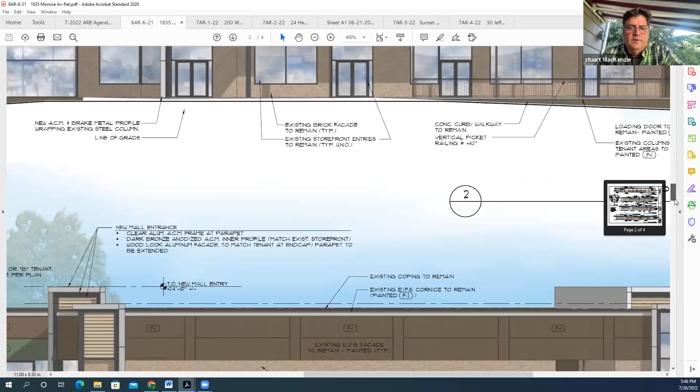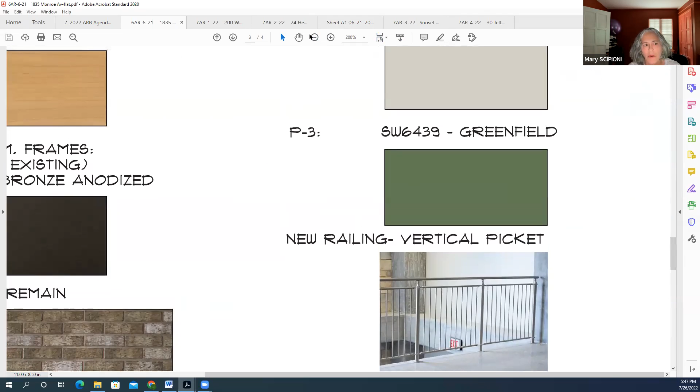Unless, Mary, we accidentally thought it was gray this whole time for the main building and it was actually bone white. No, that would be a mix. If you go to the samples of the color, the very first one on the left column has a number code on it. Slow down - there it is, ACM1, bone white. Or if you go to the drawing, that is called out for that surface. That's the problem, it's just miscommunication.

Yeah, I know what it is. The ACM color is one color, but the matching color for that, because it's a different material, is an Alucobond's bone white. So what he's trying to do is say that they're matching - the color is matching, but it's just called bone white in the Alucobond series.

Isn't it a gray color? The bone white is a gray color. It's not actually white, they just call it bone white - it's just a term. But I think what he's trying to say is that what matches the existing is the bone white Alucobond.

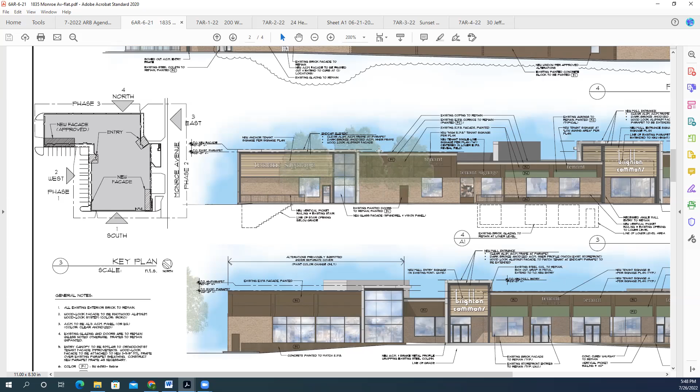I was going to say, I walk by this almost every day. It is not raw aluminum color. It is definitely a beige, light taupe. It's not clear aluminum.

Interesting. Just say what match - did we approve? Well, we can say that it should just match existing, and then if it doesn't, don't have them come back in. Well, now I want to know what we actually approved for this, for the original project, and did they install what we approved?

Well, let's find that out at another time. Okay, that's your assignment for next meeting - start clicking old links.

Just note: match existing, or match previously approved colors by the Architecture Review Board. There you go, that's perfect - that covers our base.

Didn't it say on the application that that's the one thing they wanted to change? I don't know, they would have to change the whole building then. I just don't remember what they said on the application because we're only looking at one image at a time here, so it's hard to tell. I mean, the application from last year - no, the existing one. Oh, they didn't submit an application for this, they just have this revision cloud around that whole condition. Correct, yeah.

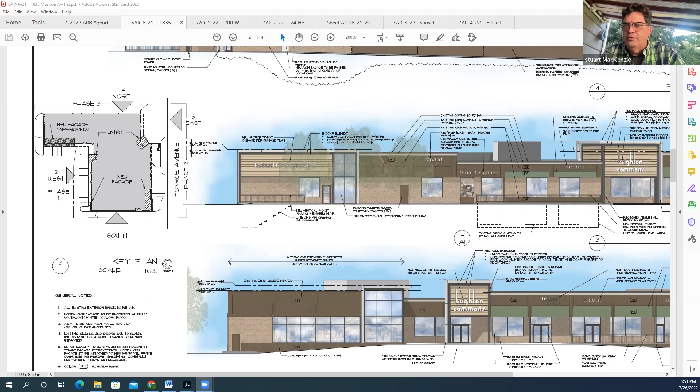Next is 7AR, Fran - which one is this? The front porch? Oh, this 7AR1. Yep, approve. Casey?

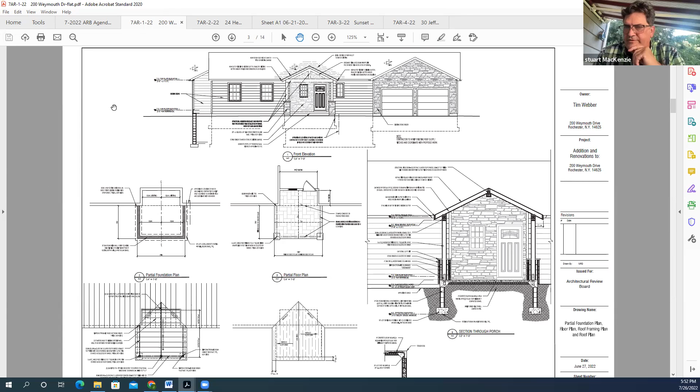Andrew? Yeah, I would approve, but I would make it a condition, not a recommendation, that a base be applied to those piers. Andy, is this Jeff Hawthorne's old house, or is he next door? No, I don't believe so, I think he's next door. Okay. Brian? Approved. I approve as presented with the condition mentioned. All right.

7AR-2. May I say one thing? I found the Brighton Commons that we approved, and it was clear anodized - it was not an off-white or a bone white.

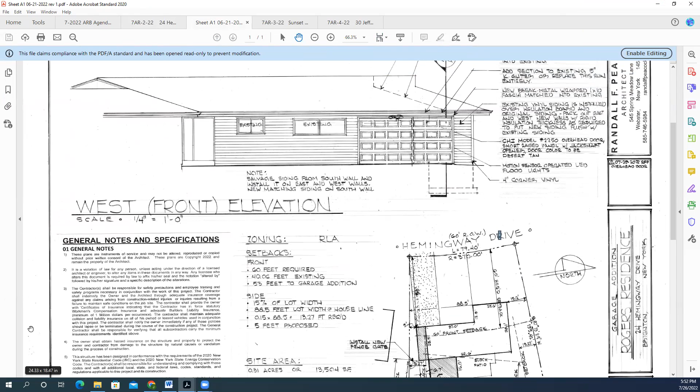So maybe they couldn't do it clear anodized and had to do it in bone white, and that's what they're asking for at this point in time. Shouldn't they have come back to us for approvals?

Well, call him in, have him come in next, and then we just formally approve it. So it's June of 2021 since we last saw them. Don't give him a C of O. I think that ship has long sailed.

So Fran, we're on 7AR-2. Approve. Casey, yep, I was good with this one too. Mary, updated one, approve. Andy, approve. Brian, approved as presented.

7AR-3. Yeah, this is a little odd. I don't know, it's a little awkward to me, but I don't know. What do people think about this? How does everyone else feel about this? It's kind of clunky. Yeah, it is clunky.

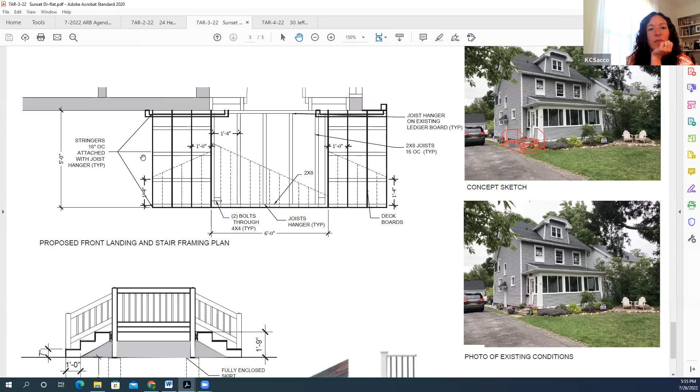Because his drawing, the railing, the cap he selected, and he needs to revise the plan to match the ins and outs, the bump out or recess of the porch, and adjust the stair widths accordingly. Yeah, so his updated drawing needs to represent existing conditions.

Yeah, and then do we want to have him come back and show the skirt material? Do you think it's worth doing that? I don't know. I would say no, not to see it again. Yeah, I just think our inspector can catch that.

Okay, is everyone all good with that? Yeah, it's not significant. It's under 16 inches.

Mary? So I would approve on the condition that all drawings and representations of the work are accurately portrayed and submitted to the town. Okay. Andrew? Yeah, I would approve with that condition. Brian? Ditto, I agree, and just make sure all setbacks are met, et cetera.

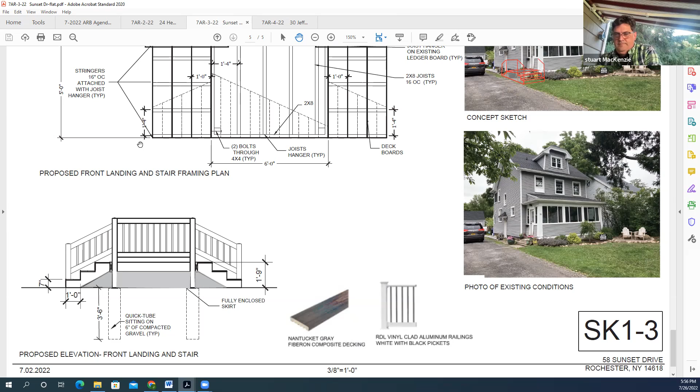7AR-4. Resubmit with materials called out: colors, profile, the roofing material, color, lighting.

So tabling it. Yes. KC, yep, agreed, table, need a lot more materials. Mary, yes, agreed with all. Andrew, yes, table. Brian, table. Okay, table it. All right.

I would also add if we need to review the dumpster enclosure, we do that. Jason, can you verify that we have to do that? I'll double check, Rick and I were having -- this is still something I'm learning, and I'm struggling with the tradition of the ARB that you only look at things that are actually attached to the building. Well, commercial properties are a little different from what I remember.

Because I had a giant detached garage come in and I was surprised it didn't need to go to ARB, but a tiny little canopy over a front door does. That seems inconsistent to me. For commercial properties, I believe we need to review all sides.

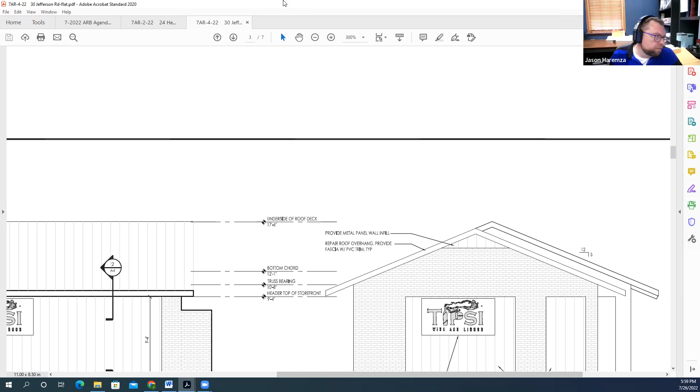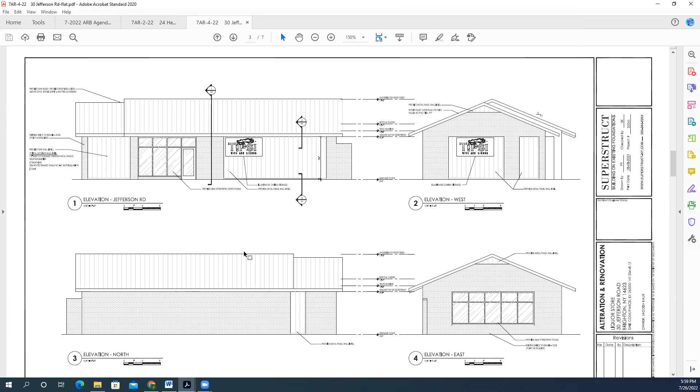Good, enjoy what we have left of summer. Stay healthy, going fast. Thanks, everyone. All right, thank you. Have a great night. You too, thank you. Night, everyone. Bye-bye.